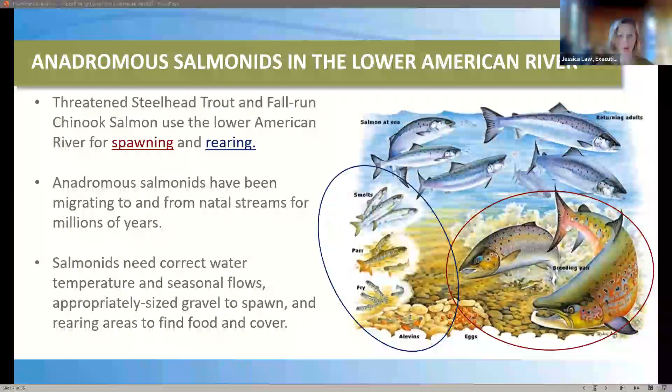Their habitat has changed a lot over the last 150 years. When Californians arrived, or what were to be Californians, in sort of the 1849 gold rush era, there were a lot of changes that happened on the landscape, massive landscape scale changes that have dramatically reduced the habitat available.

With dams, with the rim dams, that habitat area has been cut off. And with the decrease in habitat area, it's really impacted the fish's ability to reproduce and to be productive and really to thrive and survive.

Dams alter the hydrology, they block sediment transport. There's a whole other host of impacts associated with dams, including reducing that spawning and rearing habitat extent, function, and quality. Of course, these dams also provide extensive flood management and flood protection, and are a part of our modern landscape.

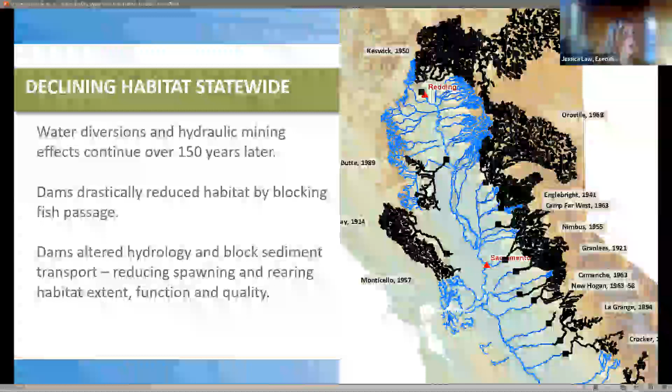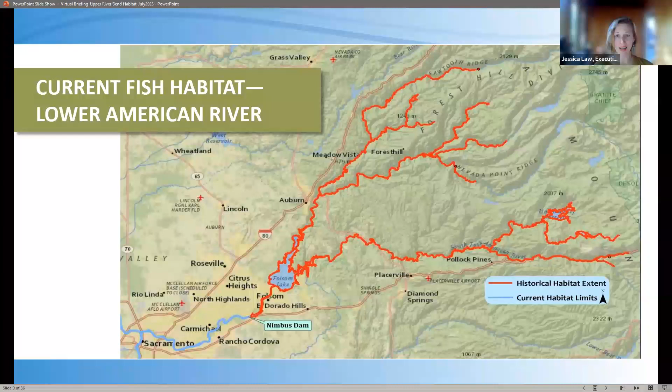Okay, that's the story of salmon. I am going to turn it over to Erica Bishop, program manager at the Water Forum, to talk a little bit more about the habitat program and especially the projects that we've got coming up this year. Thanks, Erica. Thank you, Jessica.

So tacking on to the overview that Jessica gave us, she showed us the watershed and really what our habitat extent is for our salmonids in the river and in our American River watershed now. And that is where the Water Forum comes in.

Her previous slide, she mentioned how our salmonids used to be able to access almost 200 miles of main stem and tributary habitat that would have existed upstream of Nimbus Dam. However, since that is no longer accessible to our salmonids, that's where the Water Forum comes in with our habitat enhancement program.

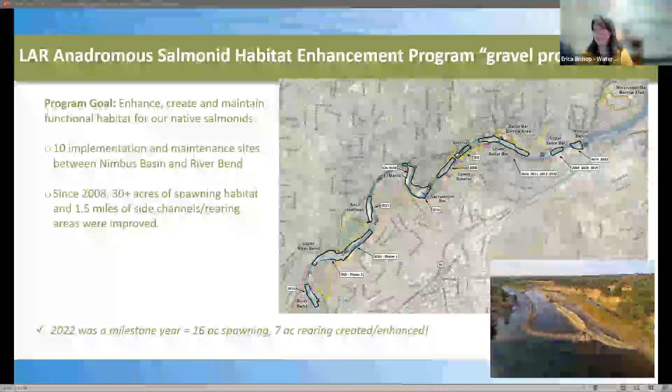Many of you probably are familiar with some of the work we've done in the past, and our projects are focused in that lower portion of the river below Nimbus Dam, where our salmon and steelhead still have access to the river and can come in and complete their life cycle.

The projects you see here, we actually have 10 sites. This is part of a larger program and a larger plan for the river. These sites run from Nimbus Dam down to Riverbend Park.

The sites where we have worked in the past and may work in the future, including this year, include areas where we know our salmonids have used these habitats in the past. They're known spawning areas, or they're areas where, with a little tweak and some enhancement, the habitat would become more suitable for salmonids.

These areas are located or concentrated in this upper half of the lower American River because that is where we have the coolest temperatures and where the hydraulic conditions are the most suitable for our salmon to come in and spawn. They are driven by instinct, as Jessica mentioned, to come in and go as far upriver as they can.

So our program since 2008 has enhanced or created dozens of acres of spawning habitat for the fish that are coming back in to complete their life cycle as adults.

And in more recent years, we have expanded into providing side channel and seasonally inundated rearing habitat. And I want to thank all of our parkway stakeholders for your patience as we did work last year.

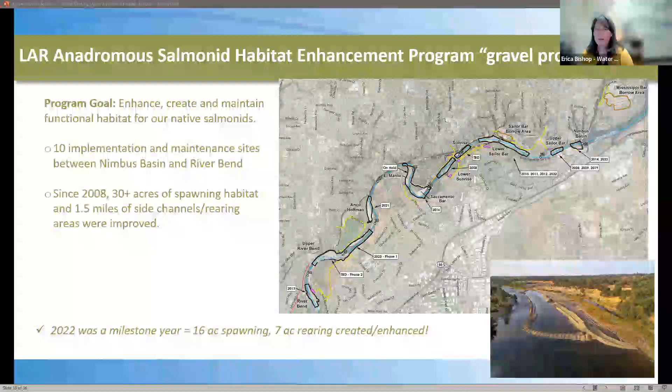There we go. All right, before we talk about what you can expect at Upper River Bend this year, I'd like to share a little bit about some of the results we've seen just upstream.

As I mentioned, our salmon and steelhead are driven by instinct to go as far upriver as they can. However, we know that every salmon and steelhead in the river, there isn't room for them all to go and spawn in Nimbus Basin or at Sailor Bar.

So part of our program goals are to enhance habitats farther downriver so that the fish are more able to spread out and have a better chance of success, if they have better conditions farther downstream, to have effective habitat to come in and spawn. This should help the population.

So in 2021, we took a chance and we worked much farther downriver than usual at Ancil Hoffman Park, just adjacent out from the nature study area. And it paid off. We were very excited, especially since this project in 2021 was during a severe drought year. We all know how low the river was that year.

We have contract crews that are out on the river assessing the habitat and looking at what's going on and how the fish use it every year. The year before we worked at Ancil Hoffman, we saw very few Chinook redds at the site, and we didn't see any steelhead redds at all. The year after the project, it's almost as if we're backing the equipment out of the river and the fish are already coming in. We saw that bump up from 1 to 3% of total redds on the Lower American to 14%.

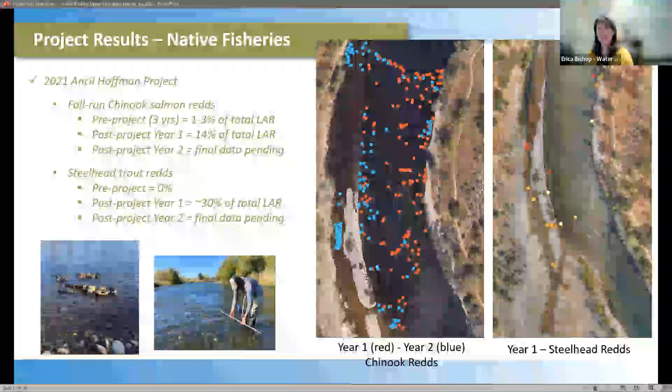I should mention, for those not familiar with the salmonid life cycle, the redds are the nests that female adult salmon and steelhead build in the gravel to lay their eggs, so that they may incubate over time in that cold flowing water. So we go out every year and count all of the redds occurring in the river, either on foot or via aerial photography, so that we have a very good snapshot of what the fish activity looks like in the river each year.

So from year one after the project and year two, those are all of the blue and red dots you see over to the right on that first photo. You can see that the fish really, really liked Ancil Hoffman. So that tells us that it's a good idea to come back down to this part of the river and try again. Our Chinook salmon are the most abundant run in the river.

We do have our steelhead trout. There are not nearly as many of them on the Lower American, but they also really enjoyed Ancil Hoffman. We didn't have any steelhead spawning in this area at all the year before the project. The next year, although there may not seem like many dots on that steelhead photo, when we only have about 100 redds for steelhead in the river each year, having 30% of them at a single site is a really big deal. That was very exciting, very gratifying.

We know that part of the reason our steelhead liked this area so much is that we actually tweak our gravel size to serve our Chinook and our steelhead ever so slightly differently. At this particular project site, we made that gravel a little bit smaller, and that works better for the steelhead, who are a slightly smaller species than the Chinook. We had fantastic results.

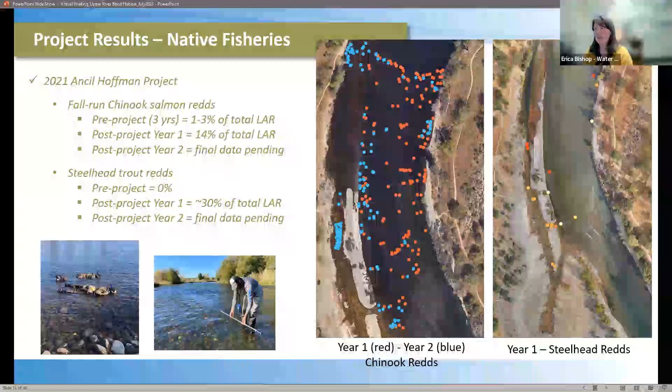Also, the Water Forum is focused on improving fishery conditions, but as Jessica mentioned, our co-equal goals include aesthetics, recreation, and wildlife, and we want to be a good neighbor on the parkway and do what we can for other resources.

Before I get into the next project site, we know there's a lot of disruption when these projects are implemented, especially with the growing rearing component, which means there's more grading that occurs on the site than in the past. It's moved beyond just putting gravel in the river.

So I wanted to share some photos here that illustrate what you might expect immediately post-project, a few months after, and then about a year to year and a half later.

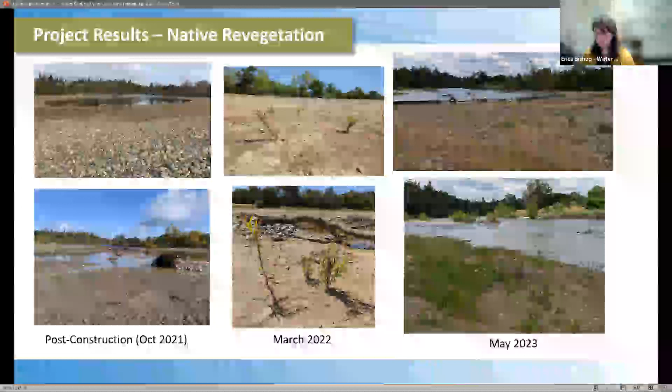Then out in May this year, there was a super bloom in Ancil Hoffman. I hope everyone had a chance to see it. The lupins, our yarrow, everything was just exploding, and you can't even tell that any work was done there at this point. This is what we're going for, this is what you can expect as the site evolves over time.

The immediate change can be quite different with the graded site, but once the vegetation starts to take hold and our natives take over, it really starts to look good. All of this vegetation, especially our willows as it grows in, helps provide cover for our juvenile fish in the rearing area, which I'll talk more about in a moment.

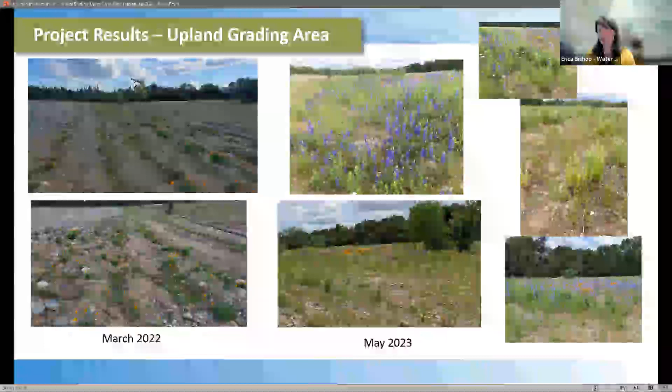So now that you've seen a little about the past project, the nuts and bolts of Upper River Bend Phase 1 - the Phase 1 piece, I want to call that out. This is a very large site, the Upper River Bend site. Phase 2 is downstream of this. As of now, there are no plans, we do not have a schedule for the Phase 2 portion, so it's really just this upstream part.

Once we get started - I'll talk more about schedule later - our crews will bring in the large equipment they need via the park road, that's Tarshes Drive and through Ancil Hoffman Park. They will use the asphalt trail currently used mostly for golf carts and foot traffic to access the site, and stage equipment there that will stay out until the project is finished.

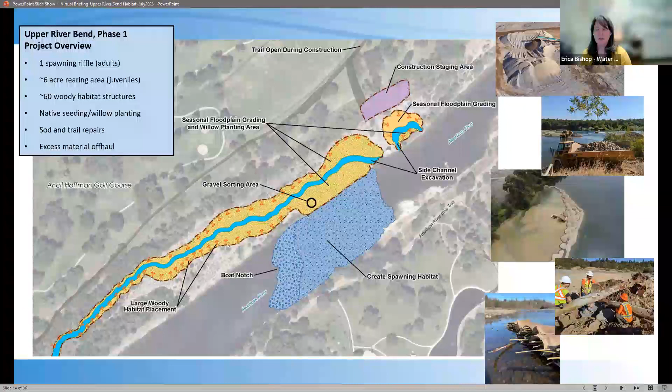So that material is what we put in the river to create the spawning habitat for our adult fish to use when they complete their life cycle. This is the material that our female fish use their tails to create a vacuum and swish the gravel around. They like the clean, fluffy gravel, and it works really well for them to build their redds and lay their eggs.

After our crews, actually while they're doing that work, they will continue excavation of these orange areas. These areas where we've taken material out to use in the river for spawning gravel do double duty. These are borrow site areas, and they also become our rearing habitat.

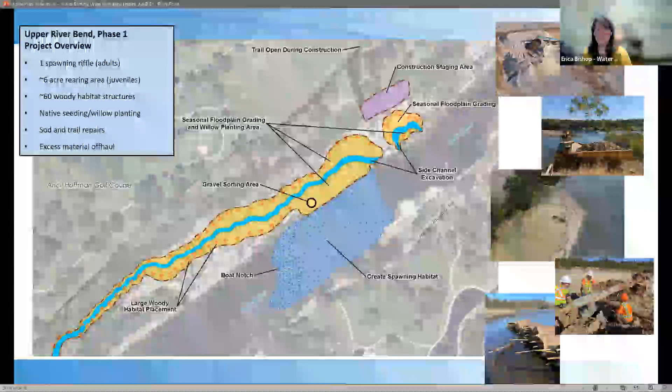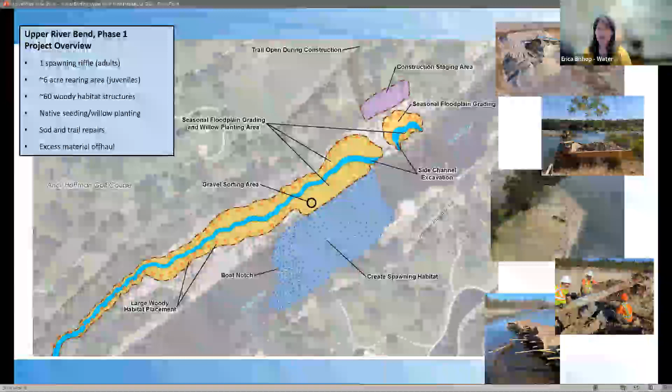As those adult fish come in and lay their eggs in the spawning gravel, the eggs incubate for several months. Eventually those fish hatch, and they need areas along the side channel areas and seasonally inundated floodplain areas along the channel margins where the water doesn't move as quickly, where it's a little warmer, where we have things like willows and woody habitat for them to find cover and food, hide from predators, and really have a chance to rest and live and grow as large as they can before they're ready to migrate out in the spring and early summer.

In these rearing areas, once we have all of the grading completed, we will go through just as previous projects and seed these areas with our native seed mix, and also place a lot of woody habitat. The woody habitat is actually driven into the bank with an excavator and covered up, and all of the nooks and crannies that are created by that habitat, which are repurposed orchard trees.

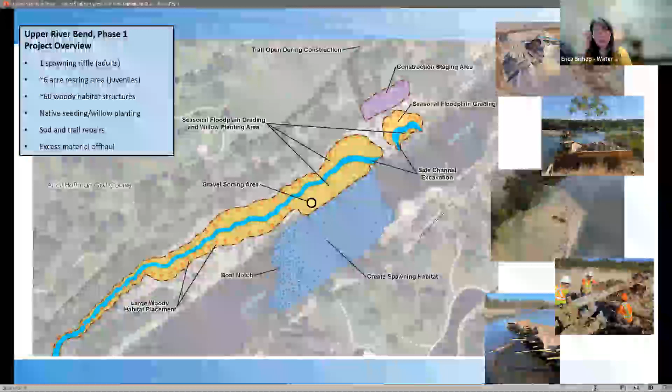Normally, orchard trees are ripped out and they get chipped and disposed of. So we have found orchards where trees are going to be removed, and we're going to be able to bring those directly to the project site, and they will live on as habitat for our fish.

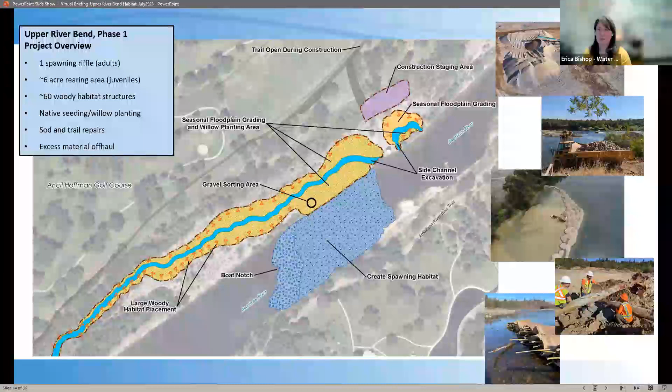The crowns and the root balls of whole trees are fantastic habitat for our juvenile fish. All of the little nooks and crannies that exist in that woody material are where they like to hide and find food. So anytime you're talking about fish, wood is good.

Over time, there was a policy of removing wood from rivers due to flood concerns and public safety. So we were very excited more recently to be allowed to incorporate wood into the projects. For public safety needs, that wood is only concentrated in the side channel areas. It is not in the main channel.

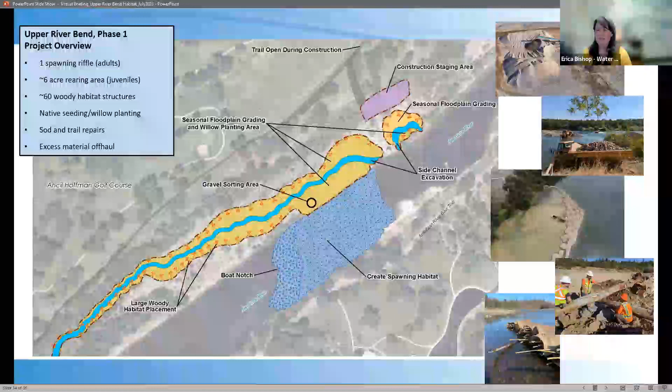Once we get our wood placed, at the very end of the project, we will come in and plant almost 4 acres of willow cuttings, so there should be a good amount of cover getting started for our fish. We expect some natural recruitment of willows and other vegetation over time. What we do with the plantings is really just give Mother Nature a boost of a season or two so that there's something there to start.

Once we're finished with the project, we will fix the sod in areas where we've needed to cross the grassy areas and make any trail repairs to the asphalt trail as needed. We will also have some excess material off-haul this year for the project. I'll talk a little more about what that means and what that haul route is in a moment.

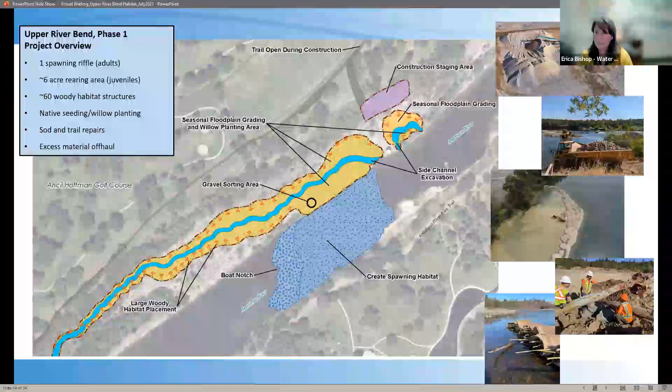Not to get too in the weeds on design drawings, but I always like to include these because it illustrates how we build the projects and how we design them. These projects are part of an adaptive management approach. There's a tremendous amount of modeling and iterative design that occurs so we can look site by site and learn what we can from past projects, what worked and what could work better. They are designed just like any other engineering project you would see.

What we're going for here on our spawning riffle, you can see the boat notch is designed in, and you can see where we place our cobble downstream so that the riffle stays in place for longer. Then we place our gravel upstream, and that is the material that the fish will use, that they're going to target. It's really what they're looking for when they come in to spawn.

Our habitat is effective at a range of flows, because we know a lot can change in the Lower American over the season. But what we do is go for an average. On average, once completed, you can't see our spawning riffle.

That's the great thing about spawning habitat: if you do it right, you can't even tell that it's there. It just looks like the river.

When we're finished, we have about 2 feet of depth of water over the riffle, and the water moves about 2 feet per second. Those are a rule of thumb and very important. You want to have a good depth of water so that you never have redds dry out when those eggs are sitting there. Eggs are an immobile life stage for our fish, so once the eggs are in the gravel, we need to do what we can to make sure the habitat is effective for them. We want a good depth of water over the riffle once we're finished.

We want our water moving over the gravel and through it. The way the gravel is placed means we have subsurface flow, and that's very important for the eggs while they're incubating, because just like any other living being, eggs as they're incubating before they hatch have metabolic waste that needs to be washed away. They also need cold, oxygenated water flowing over the eggs so they have the best chance of success. We design the project so those conditions are optimized during the incubation time period.

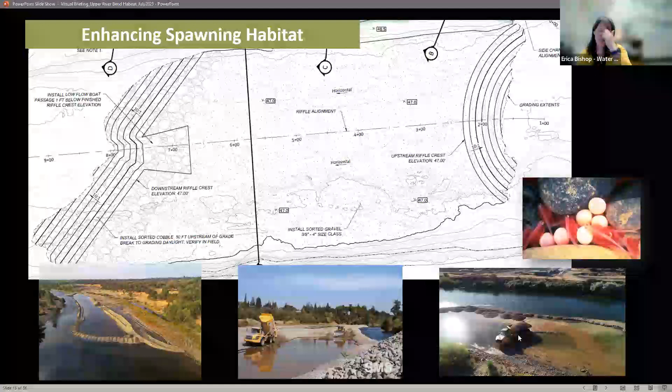You have some photos here that really illustrate the berm and how we place the spawning gravel, and really the magnitude of it. The two on the left are both from Ancil Hoffman. We had a very long riffle at that project, and it was exciting to see it go in. The one on the right is from Upper Sailor Bar in 2019.

The other aspect of our habitat is the rearing habitat. As I mentioned, once those eggs have incubated for several months and are ready to hatch as fry, they go out and try to find food, start eating on their own. They have absorbed their yolk sacs and are looking for areas like our side channel and our seasonally inundated habitat.

This project is exciting because we have both types of rearing habitat. We have a side channel that will never go dry, even at the lowest flows allowed in the river, which is about 500 CFS. We actually were at those low flows in 2021.

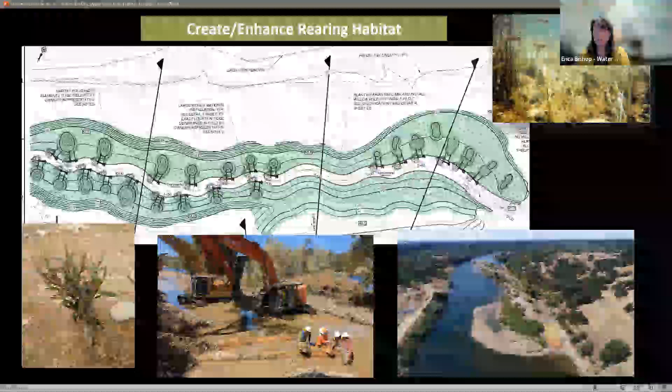So we design our habitat so that it doesn't go dry, even in the worst case scenario. And then it's surrounded by these areas you see in green. This is seasonally inundated habitat, meaning that over the year's time, the depth of water in these areas ebbs and flows with the season, inundating the woody habitat we place, as well as areas covered in grasses, other plants, and willows, providing a great spot for our juvenile fish to hide.

You can kind of see that illustrated in this photo here, the fish under the water taking advantage of that habitat. Just a few photos here - this is our willows after they start sprouting.

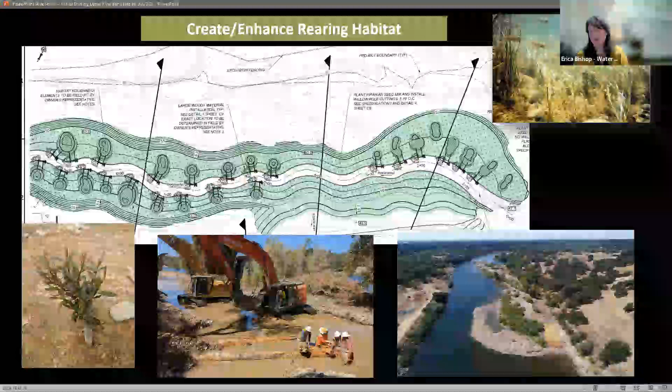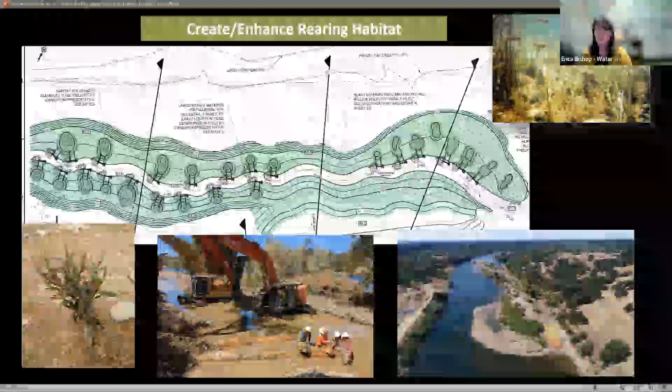These are our crews last year actually placing our woody habitat in the side channel at Lower Sailor Bar. In the photo on the right, you can see how, during construction of our rearing habitat, we protect water quality by leaving a huge block of material at the upstream and downstream ends. We do all of the work in that muddy water so that it's isolated from the main channel, so we don't have any water quality impacts. That isn't opened up until the end, until we're finished with all of that disturbance. You can see that in the photo on the lower right - that was at Upper Sailor Bar in 2019.

So what can you expect as a Parkway visitor? This is a big project and it's going to take a couple of months to construct. We are expecting to start August 14th and to go for about 8 weeks.

You can expect construction noise from 7 a.m. to 6 p.m. We will have crews on site starting at 6 a.m., but they'd be doing quiet activities such as equipment maintenance and safety talks during that first hour. The no-noise period is something we want to hear from the public about - if you do hear noises outside these areas or hours, let us know, because we do try to instruct the crews to be very careful not to have backup beepers or use air tools during those quiet hours.

We will have some haul traffic that is new, but it really isn't that much over the length of the project - about 1 to 3 truck trips per hour of fairly small dump trucks for around 25 days. That would not occur on Sundays at all, concentrated Monday through Saturday. And for all of our past projects, we do have certain areas blocked during active construction where we may be excavating and it's simply unsafe for the public to be there.

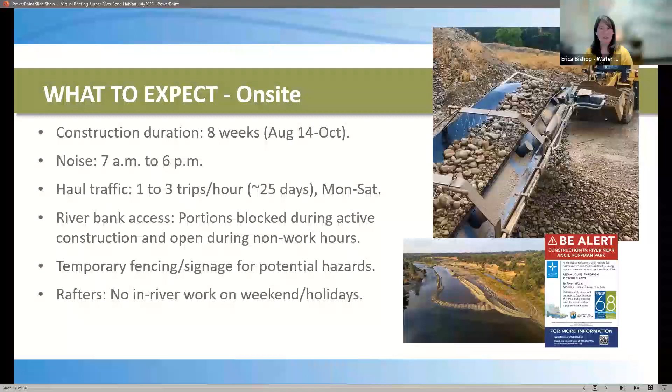But during non-work hours, you will be able to get to the river. We have people always coming through the site, and our crews know how to work with the public and help keep everyone safe. We do have temporary fencing where needed, the orange construction fencing that will help direct the public around areas where we don't want them for their own safety, and signage for potential hazards - in many languages, which I'll talk more about in a moment. To be a good neighbor to our rafting community, which has given tremendous support since the beginning of these projects, we don't do in-river work on weekends or holidays, which usually includes Labor Day weekend during our construction period.

So many questions I've had recently are about this haul route - what is going on with this? The haul route would be removal of material via dump truck of really fine sand and sediment that we don't need for the project, excavated during construction. That material would come out the project site, go out the Park Road, Tarshes Drive. The trucks would be making a left on Van Alstyne and a right on Fair Oaks Boulevard.

We know there are several directions to go, and we always want to be mindful when we have any kind of haul traffic going through a neighborhood area, especially in a park. This route was chosen because it helps to avoid issues, since our project is starting in mid-August and going into the fall.

We want to avoid school traffic that trucks might encounter if we were to go up in the Palm Drive direction. By heading out Fair Oaks Boulevard, Van Alstyne to Fair Oaks, we can take advantage of an intersection where there's a traffic signal, avoiding trucks sitting there idling in the neighborhood waiting to make a left turn against traffic. That's why that route was chosen.

The material taken out of the parkway will be beneficially reused for other projects. Because we have a great partnership with regional parks, I've worked with their maintenance staff, and they've identified 5 areas on the parkway where we will take material, at our cost, to stockpile for future trail work or other maintenance needs. The remainder of the material will go out to Natomas, stockpiled at a Corps and SAFCA project stockpile site for future use on parkway projects.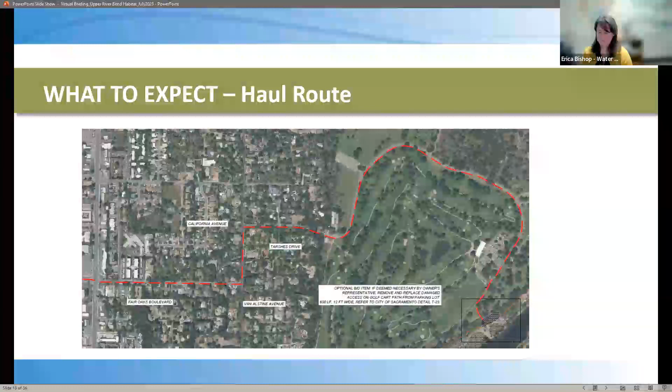As Jessica mentioned earlier, you can't do a project like this without a team. We have a lot of ongoing coordination with various entities on the parkway, including the Nature Center and the golf course. We want to work with everyone and make sure we're not impacting their operations any more than necessary. Same as in 2021 when we worked with the Nature Center, we spoke with their staff and have a good understanding of when their public and school programs occur, so we can observe a quiet time when needed, or full silence if they really require it.

Working with the golf course staff, they've been tremendously supportive of the project and asked how they can help. I told them we'll do most of the work, but we really appreciate it. They've been a great partner on all the projects so far, and previously hosted an open house for us on past projects.

For those of you familiar with the project site, that gravel bar has a white tower on it—that's actually a Carmichael Water District intake that is not in use right now, except by a lot of birds who really enjoy spending time there.

Since they are a Water Forum member, it was an opportunity to reach out to Carmichael Water District's general manager and their engineer. They had a chance to review our drawings showing where we plan to excavate, and we're keeping them in the loop to understand any concerns, so we don't affect their facility sitting there.

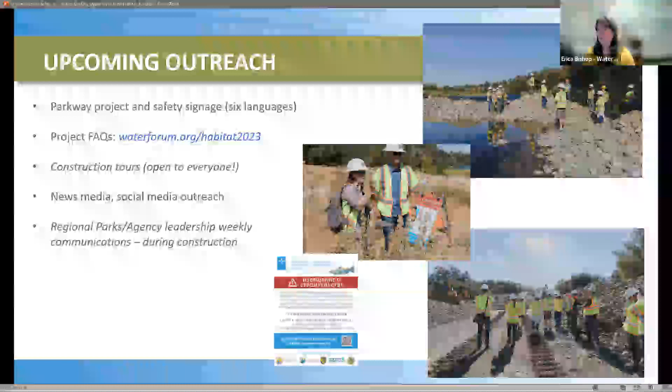And I think, other than seeing the fish come in and use our projects almost immediately after we're finished, the construction tours are definitely my favorite part of the job. It's a great opportunity to get really diverse groups on site together. I always learn so much from our stakeholders and the questions that they ask and the information that they offer. So I encourage everyone on the webinar and share with others to sign up for a tour. They're really fun. They're usually on Friday mornings before it gets too hot.

Those are open to everyone, but we have specifically reached out to our local resident groups to make sure that we're able to get all of them out on site because they are the most impacted by the project, but thus far have been very supportive, and we really appreciate that and look forward to seeing you all out there. As we get into construction, we are almost always on the news.

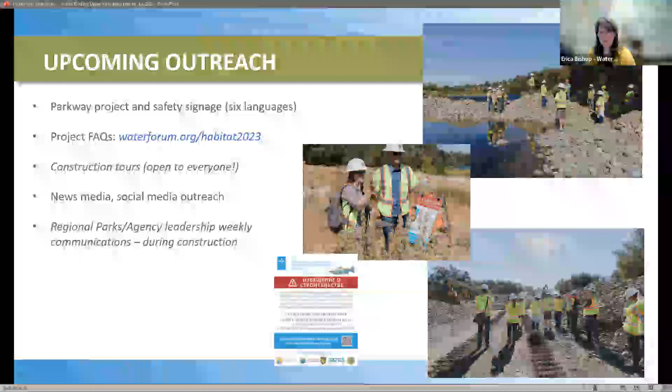We reach out to the news media and social media to help inform the public and the region and educate folks on what is going on in the river, why they might be seeing bulldozers and other large equipment so that they aren't alarmed. And it also helps to highlight the place that our salmonids have.

We are one of the few major cities that has a salmon run coming through it. So the parkway is a jewel and the river is really the crown in that, having the fishery there. We really enjoy educating the public on that aspect of the parkway.

And once we're in the nitty-gritty of construction, I provide a look ahead to our regional parks and agency leadership every week, what to expect.

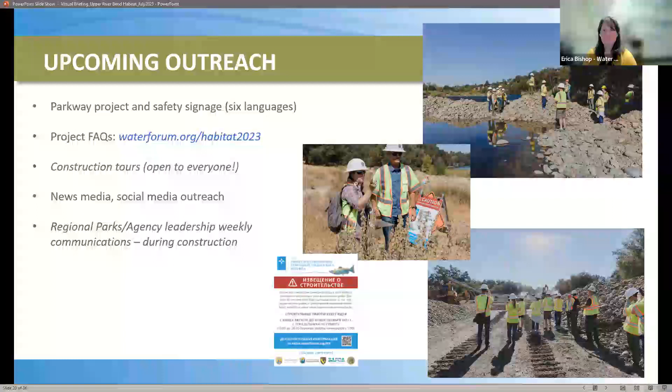And a little bit as we start to get toward the end of the webinar, there's a lot of oversight and approvals that need to happen so that projects like this can occur.

As a partner with Regional Parks, Water Forum did participate in their natural resource management planning process. And we do go through to make sure that we're consistent with the Parkway Plan and the Natural Resource Management Plan before we implement these projects. This is all part of what we take into account. Our projects were actually included in the analysis that occurred when regional parks prepared their own plan.

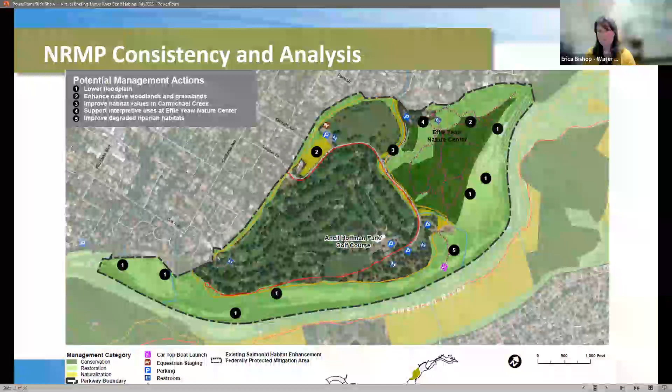And you may wonder why we're doing this work during the busy recreation season. Part of that, we have quite a compressed construction schedule. That's part of why the crews work long days.

And there's a lot of work that needs to occur in a short time period because we are restricted when we can work in the river, not only by the flood season and those regulations, but also the Endangered Species Act. Chinook are a species of concern, and we do have a threatened steelhead population on this river. So we are bound by the ESA to complete our work in just a short 4-month period.

And we know that pushes the work into the late summer and early fall. We want to do the work when the flows are as low as possible. And we do work with reclamation to understand what their flow forecasts are so that we can time the work to be most effective and work around when we may have higher flows earlier in the summer when they are making deliveries down the river.

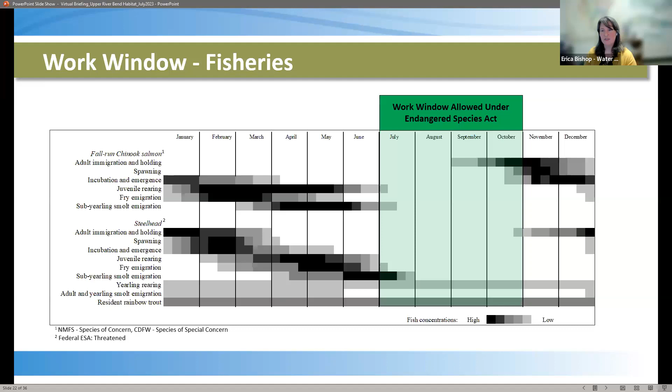And I do not need to get into a list of all of the permits that we get, but I do like to highlight this: even though this is restoration and enhancement work, there's a tremendous amount of oversight that occurs on these projects by many state, federal, and local agencies that evaluate the work we're proposing to do for all aspects, all resources.

They make sure that we aren't going to impact cultural or tribal resources. Although we are restoring one habitat, we do have to make sure that we don't harm another. So we have our biological resource agencies that oversee the project. We also have oversight from other agencies such as the Corps and the Central Valley Flood Protection Board, who look at the project from a public safety and flood and erosion perspective.

So there's a lot that goes into this, and all of these permits are on the Water Forum's website, and we're happy to answer any questions about them.

And last but not least, we strive to not just build projects and walk away. This is a long-term investment of Water Forum's time and efforts of our funding agencies and supporters on the river.

As I mentioned, we have been working on the river since 2008, and since then we have been conducting a tremendous amount of science and monitoring. We have crews on the river that assess how effective our habitat is. Some crews are actually snorkeling so they can count how many juvenile fish they see, measuring how many juvenile fish are using our sites. We also count the redds to understand how many fish are using our sites for spawning activity.